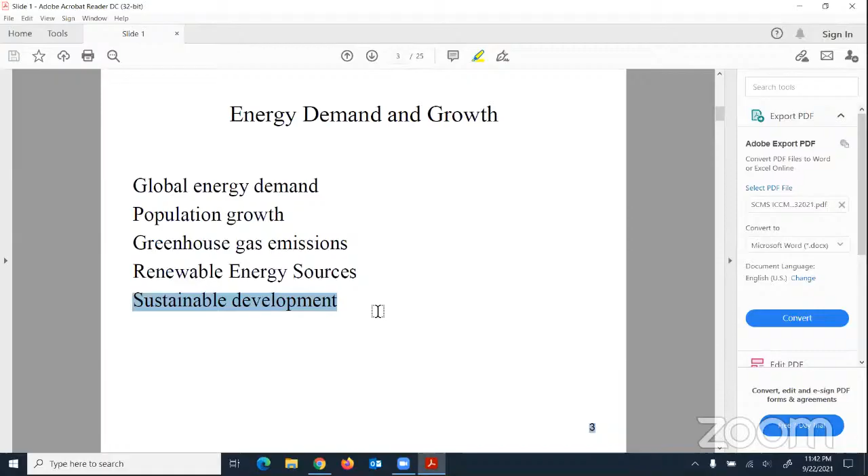So there is a growing interest to utilize more and more renewable energy sources. This way, at least we can bring down the emissions and the related side of global warming. And it will also lead to sustainable development. Okay, as you can see, I'll just give a little brief by taking this particular data, as you can see here.

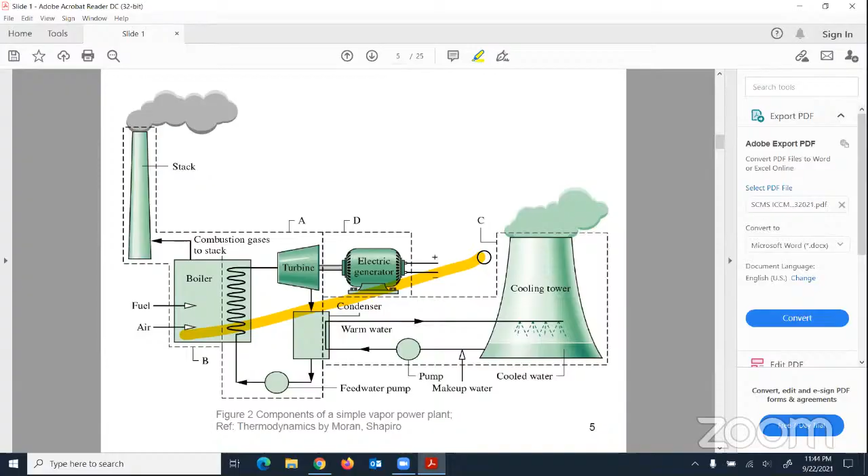So if we look into the research investigations that have been and are still being conducted, these are all aimed to improve steam power plant performance: cycle operating conditions optimization or modification, advances in blade materials and their role in work output and efficiency improvement. So research is still conducted in this area, particularly using thermodynamic knowledge to further advance them. And we can look at how, with time, the different energy systems are being developed or advanced.

So if I go to the next one, you see there's a combined cycle power generation. So maybe before I highlight the details, probably I should put what it is. So if you see here, in case of a combined cycle power generation, this is what a gas turbine cycle is. So here we have compressor systems.

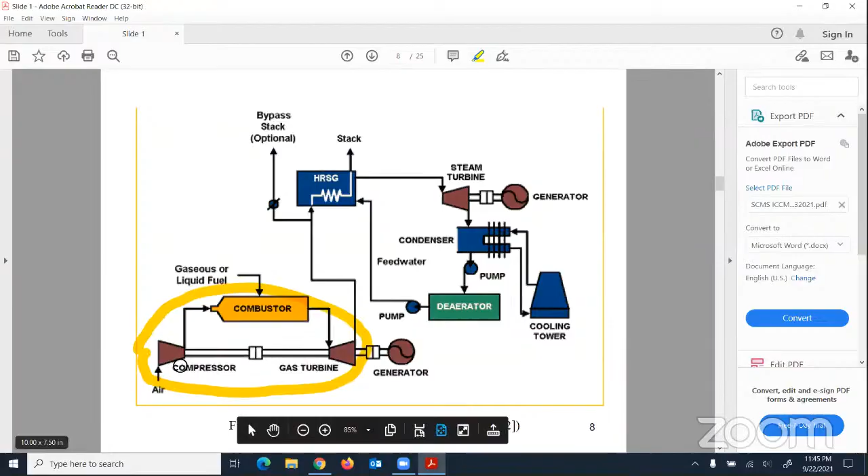So the compressed air goes to a combustion chamber. So it is represented here. Typically, it's a natural gas or gaseous fuel fed. So we burn the fuel. Depending on the gas turbine type, the air fuel ratio is controlled to meet the gas turbine temperature and operating conditions requirement. So this is coupled to a generator.

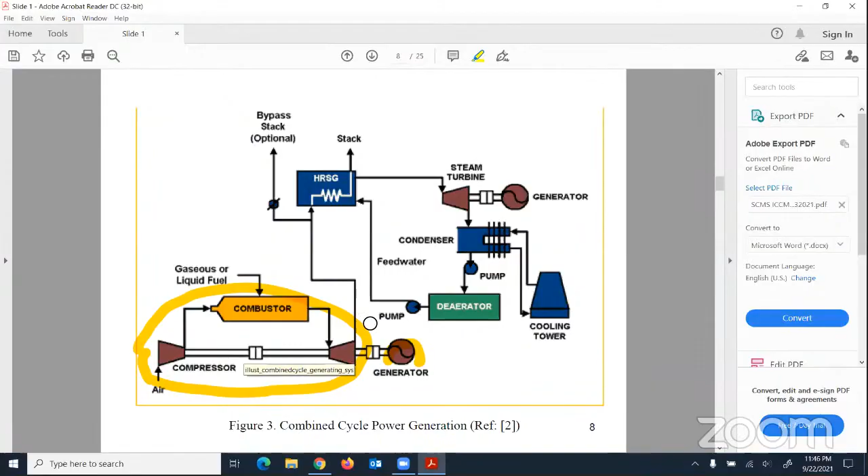So when fuel is burned, the gases go into the gas turbine system where mechanical energy is produced that drives the generator where power is produced. Now with time, with gas turbines becoming so much advanced, the exhaust gases coming out of this system are at quite high temperature. So there is a way to recover waste heat from those gases to generate steam.

So this HRSG stands for heat recovery steam generator, where part of the waste heat from these gases is utilized to produce steam, and that steam will go to a steam turbine system to which a generator is coupled, and that will produce power, and it will have all the steam cycle systems one has an idea of from thermodynamic knowledge.

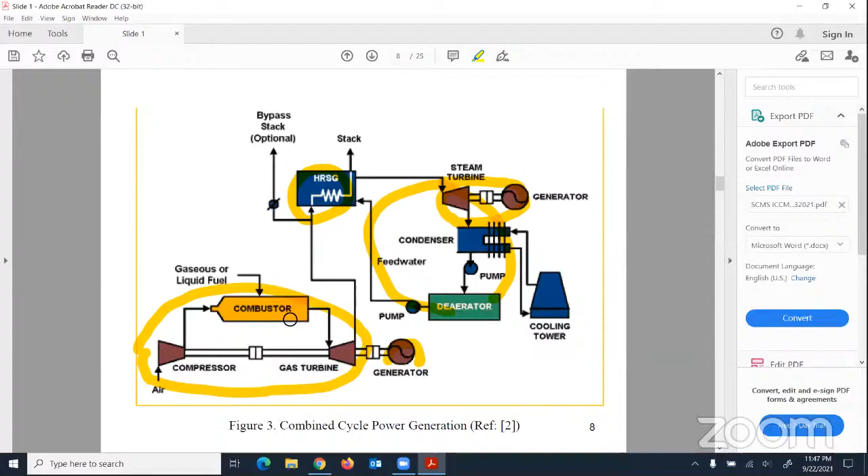So if we observe, here the fuel is fed. This is where the energy input is. So power is generated using the gas cycle system. Then the waste heat from the exhaust gases is utilized. Part of it is recovered to produce steam, and it is used as a working fluid to drive a steam cycle system. So together, this is what a combined cycle is.

These are the ones which are growing a lot in popularity because their efficiencies are very high. It is a combined heat engine system. Now, why they are becoming popular: because of higher overall plant efficiency, and if it is a natural gas fed system, then the emissions will go down. And in many cases, the economy side is also good. So combined cycle power plants are gaining popularity because their higher efficiency helps not only to produce more power, but with reduced emissions.

Now the question is still here: if it is natural gas fed, though we say it is a high efficiency system, there are still emissions associated with the gas. How can we reduce further, or how can these systems be modified, maybe utilizing renewable sources or biomass? That's what are typically called hybrid systems. So if we look into the developments taking place, this is a combined cycle system, as I showed in the previous slide.

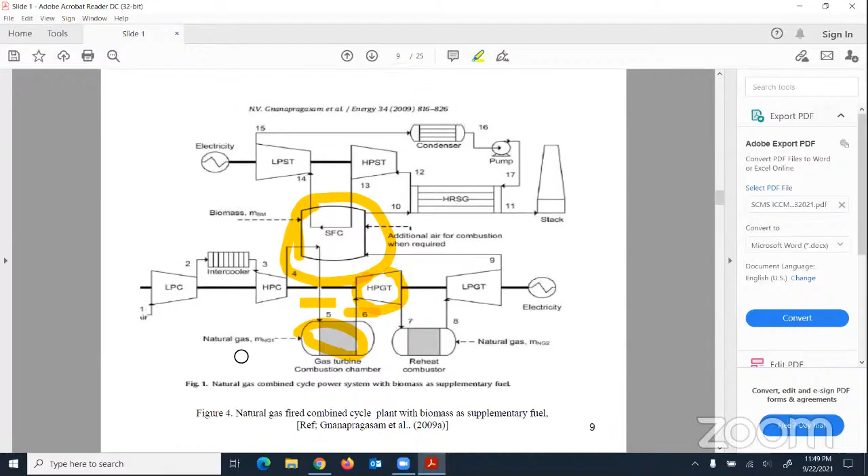Now, for a selected gas turbine configuration, for the set conditions, since we are increasing the temperature of the compressed air with this operation, it needs less natural gas. And the gas turbine system will generate power where the generator is coupled. Now this will go to the HRSG, and it is utilized to produce steam, and the steam cycle will run.

So if you notice, compared with the previous combined cycle configuration I showed, this is modified to incorporate an SFC where biomass is burned. Depending on how much energy is fed and how much heat is recovered and utilized with the compressed air, the amount of natural gas needed is going to decrease. So that way, CO2 emissions can be reduced further.

So for these types of systems, there is a growing interest now. There's a lot of research being conducted, and in literature you do find a lot of details because of their interest, or the way natural gas is now clubbed with biomass, so as to reduce CO2 emissions.

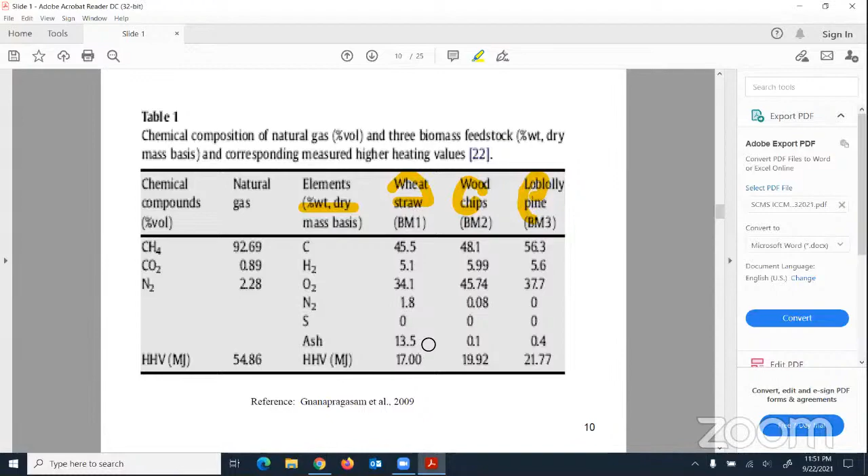There are studies, as I said, considering different biomasses. So the investigations from the literature show that there is a good scope to reduce CO2 emissions. So the research that is growing now with combined cycles is not only to improve their performance, but to utilize renewables like biomass or solar energy in hybrid mode to further bring down the carbon dioxide emissions. Okay, so that is one area.

So if we look, the current research focus in these combined cycles is a lot on how to utilize renewable biomass or solar with them, and that's where research areas are focused now. And not only that, in many cases, how to utilize even biomass in co-firing with coal to reduce emissions.

So let me show you a typical power plant configuration that could go with co-firing mode. So this is a typical boiler in a steam power plant. Imagine it was operating 100% with coal. Now we are trying to have it in a co-firing mode by having biomass. So depending on the ratio of the coal and biomass, whether based on the same flow rate or for a fixed heat release rate, the biomass and coal flow rate is adjusted such that the conditions are met.

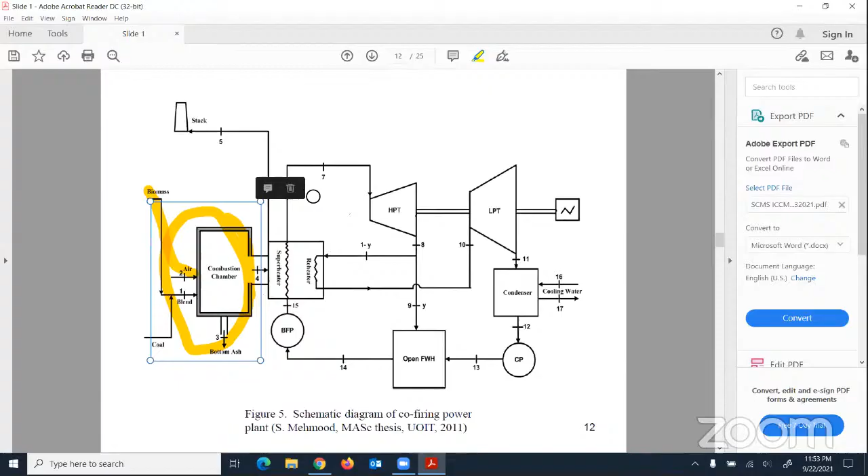So in whichever way it is, the thing here is by having biomass in co-firing mode in a typical boiler system of a power plant, we can analyze and do all the calculations related to this side. So whether we consider a particular flow rate of biomass into the boiler system, or for a fixed heat release rate, the coal and biomass flow is adjusted such that the conditions are met. So this combination helps not only to utilize biomass, but to reduce CO2 emissions.

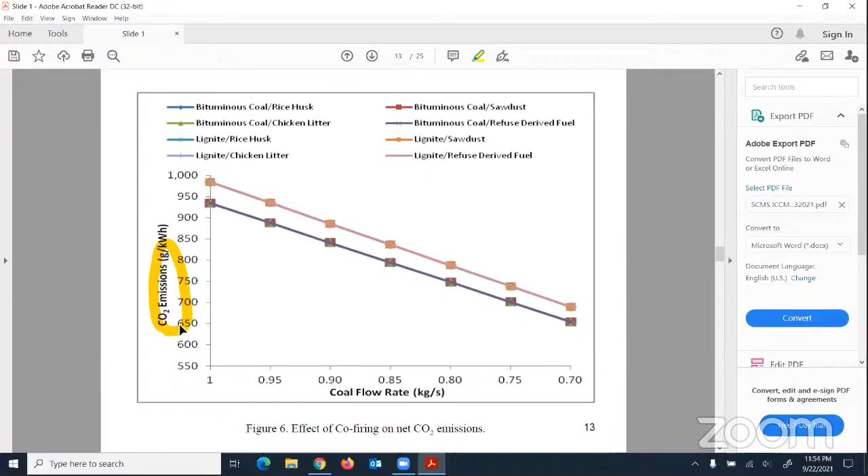So again, as I said, this co-firing approach is attracting more and more interest given its ability to reduce emissions and to utilize biomass. There's a good amount of literature and research details available. So if we see here, this gives an idea about the emissions depending on how the biomass and coal flow rate is adjusted. So as you can see, there is a tremendous amount of scope to utilize biomass in co-firing mode with coal-fired boilers in power plant systems. Thereby, we can reduce CO2 emissions.

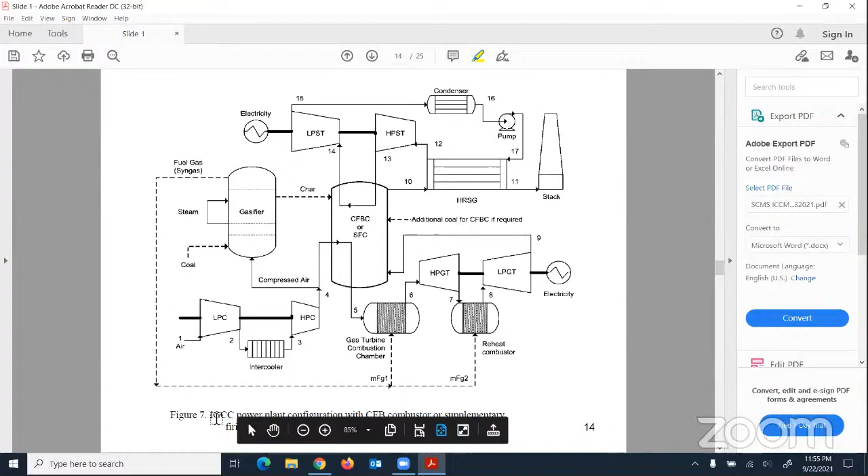The next area in continuation, from a basic steam power plant to combined cycle power plants, is how combined cycle power generation systems can be modified to make them in hybrid form using biomass or coal. Now, what you are seeing here is a typical IGCC. A lot of research is going on in these systems. What does IGCC stand for? Integrated Gasification Combined Cycle. So please let us observe.

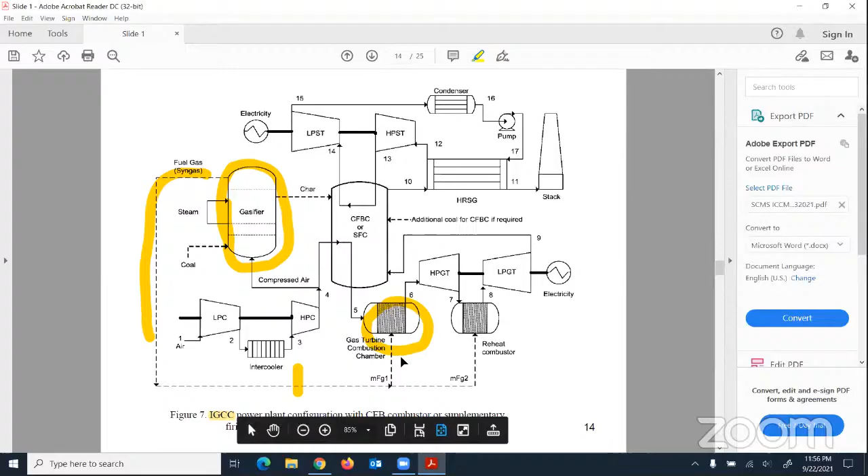So typically, this is a gasifier. Depending on the type of gasifier, let's say coal is fed, and steam or air is supplied. So we are converting the coal into a gaseous form and it is cleaned. Now this gaseous fuel is taken to the gas turbine combustion chambers. So one can estimate the composition of the gaseous fuel, its calorific value, all these details. Once we have the gaseous fuel, this is the gas turbine combustion chamber where it is burned. Now this goes to a high pressure gas turbine system. Then it has a low pressure gas turbine system with a reheat combustion system. This is where the generator is coupled.

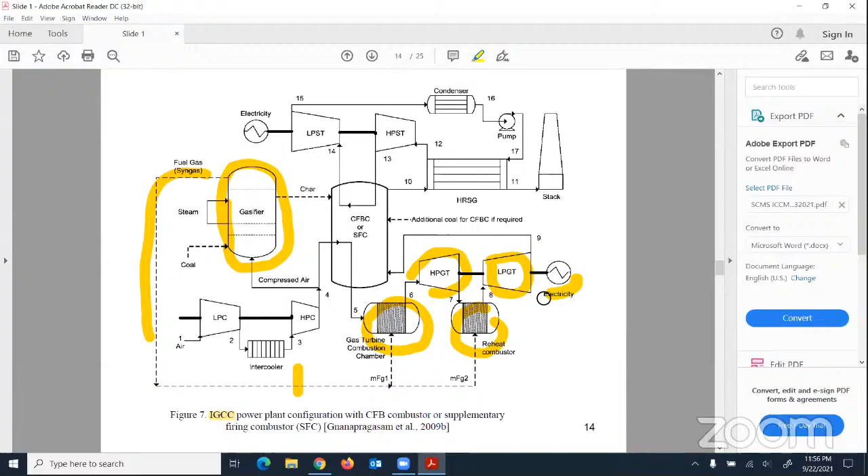So basically, we are utilizing solid fuel, which is coal. It is converted into gaseous form. The gas is cleaned and it's burnt in the gas turbine combustion chambers. And through the turbine system, power is generated with the help of the generator. Now, the exhaust gases are still hot, at high temperature. So they could go to a heat recovery steam generator and generate steam that will drive a steam cycle. Or it can still have one more combustor system in between to feed heat to compressed air.

So depending on what sort of configuration we are going to utilize, the idea here is, if it is coal, the coal is not utilized as in the steam power plant case, that is with a modified Rankine cycle system. The coal is gasified in a gasifier, the gas is cleaned, it goes to a gas turbine combustion system, and it drives the gas turbine cycle where power is produced first. The waste heat from the gases can be utilized in an HRSG to produce steam. That will drive a steam cycle. So basically, this is operated in a combined cycle mode.

Since it is integrated, that's how the name comes: integrated gasification combined cycles. So I think now, with reference to coal, the future direction is going to be, if we want to reduce emissions, we want to produce power with higher efficiencies, because combined cycles are very efficient. This is where the direction is going to be headed. This is where there's a lot of scope to do research.

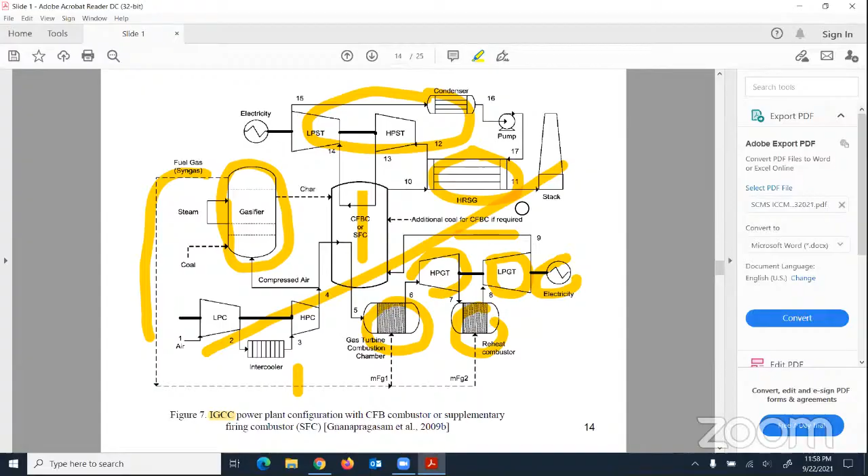And there's a growing attention. Many research investigations are conducted. So this offers a great future scope, particularly to utilize coal with combined cycle power plant configuration systems. These are highlighted. There are many areas to do research, from gasification details, analysis, modeling, to considering the type of systems, not only to produce power, but even to produce hydrogen, how biomass can be utilized as a supplementary fuel. The exergy analysis, which I will be speaking about with the second law a little later, many things can be done.

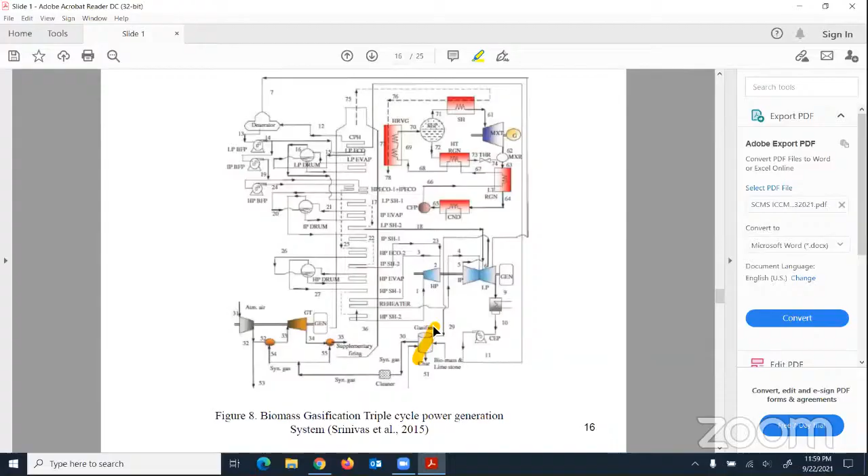So basically the idea is, the one that is shown here from a research paper is based on biomass as a fuel. So this is a biomass gasifier; it is gasified, it is clean, and that is going to be utilized to burn in a gas turbine combustion chamber and drive a gas turbine power plant system. The waste heat will be utilized to produce steam and to drive a steam cycle system.

What comes here extra is, further down, it is utilized with what you call a vapor cycle. This is not steam, please. A low boiling working fluid. So to produce power, basically using a Kalina cycle. So we have a gas cycle, a steam cycle, and a low vapor operating cycle. So this is a triple cycle from the same fuel source. This is where now you see a lot of research is again conducted in the literature.

So from a Rankine cycle to combined cycle systems, now research is being conducted and headed into triple cycle power generation systems. Thermodynamically speaking, the efficiency is getting improved a lot. For a system like this, not only thermodynamic investigations, we also need to look into economic details and many more. But as more details are understood, when economically they make meaning, they are going to come into picture. I think that is typically the developments on the power plant systems that I wanted to discuss.

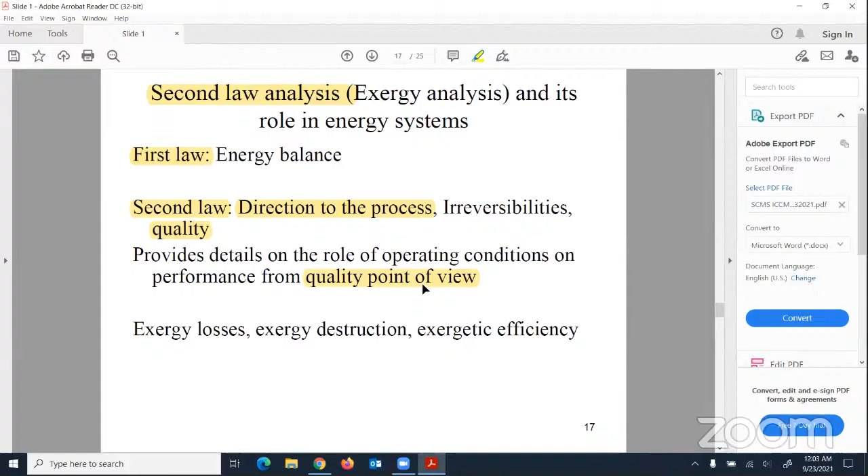And it will provide the role of different operating conditions on the system performance from a quality point of view, which I will be sharing some details on as I go through the next couple of slides. Okay, so there is a way to conduct this analysis. Typically these days, a typical thermodynamics book will provide details on how to conduct exergy analysis or second law analysis. And in the literature, we come across a lot of research that is being done.

Typically the procedure is, once any system is considered, let us say a thermal system or a power plant system, we go around at different states, try to calculate the availabilities and the role of the physical exergy and chemical exergy. Typically, we neglect the role of kinetic and potential effects or those exergies.

So in exergy analysis, the procedure is, once we know at state points the values of enthalpies, entropies, those things, we calculate the availability. So the availability could be estimated. Now we estimate what is called the physical exergy.

The physical exergy is, if you take a compressor, when atmospheric air enters through it and gets compressed, at the exit of the compressor its conditions are different. The composition is the same, but conditions are different at high pressure, high temperature. So with reference to the atmosphere, or the dead state, it has the ability to do something. That's the physical exergy, and the exergy associated could be calculated in this way.

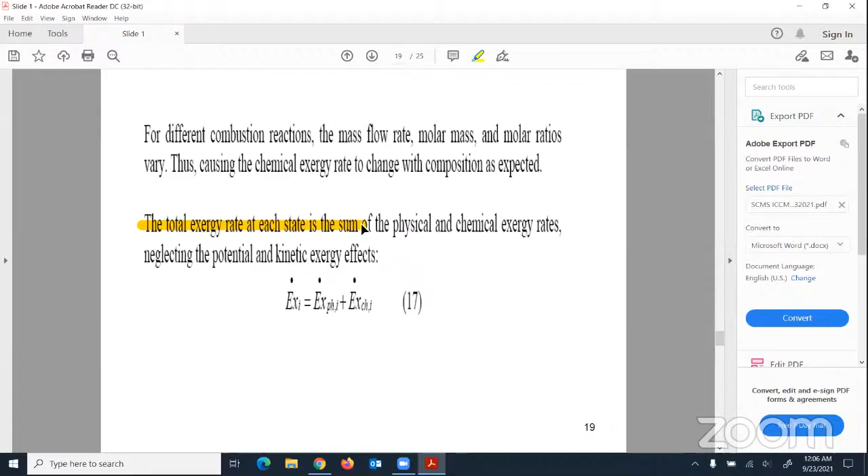So for a considered system, depending on the state, we calculate physical exergy, we calculate chemical exergy. As I already said, the exergy terms associated with kinetic energy and potential effects are usually small and people neglect them. So once the physical and chemical exergy terms are calculated, the total exergy rate at each state, which is the sum of the physical and chemical, could be calculated. So the idea is to calculate the exergy values at different states, calculate the total exergy, then we define the performance.

When we define the performance, what is it going to provide? Why should we do the exergy analysis? What additional details will exergy analysis provide compared with energy analysis? Energy analysis, typically the first law of thermodynamics, involves making energy balances, but we are not getting into the quality side of the discussion. It is the second law of thermodynamics, or the exergy analysis, that provides the quality side of the analysis and details.

Let us say there are a set of operating conditions that were taken. If we analyze a heat recovery steam generator, we are interested to see what happens to the exergy losses and exergy destructions put together. That is through analysis, and if it is represented, we see the results.

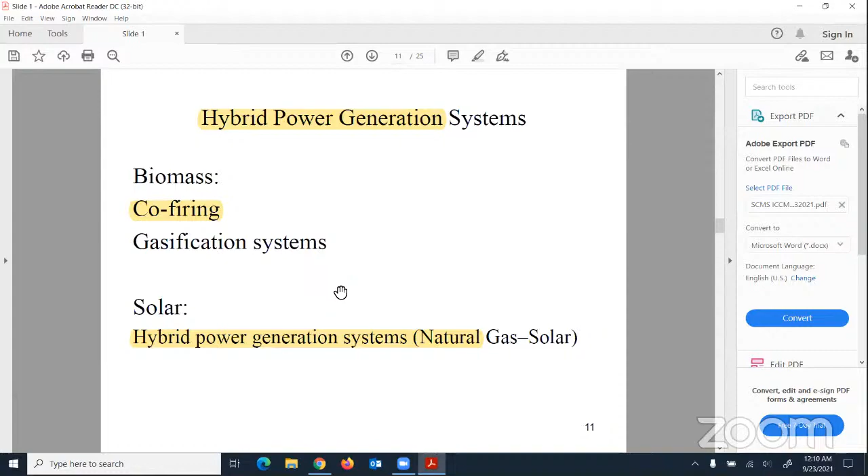So now, when we burn the natural gas with the correct air fuel ratio, the temperature associated with the products will be very high. Meaning the air fuel ratio will be adjusted to meet the gas turbine requirements. When we supply more air to bring down the temperature, that is dilution, which is an irreversibility that contributes to entropy generation. That destroys quality. So from a first law point of view, this doesn't bring out anything. It simply makes energy balances.

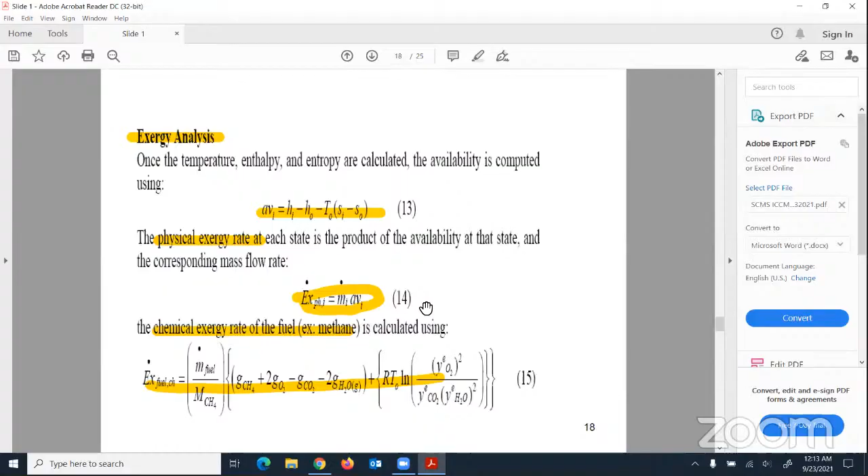So on this count, second law analysis for engineering systems is gaining a lot of importance, because exergy analysis, if we go by the procedure well laid out in the literature, if it's conducted, the results will provide a significant amount of information and details on where we can focus, on certain components or processes to improve them further, leading to further improvement in performance.

And if these are systems utilizing, let's say, natural gas or coal, there is room where emissions can be brought down. Or, from a second law point of view, those systems' performance can be increased or improved further. So that is probably good reasoning for why the second law is receiving a lot of attention.

So let me bring out one more thing. We see process heat, that is steam, is utilized in many applications because it is an effective medium for supplying heat. In earlier days, they used to use steam boilers to produce saturated steam, and that saturated steam used to be supplied for process heating applications. If we consider a boiler used to produce this process steam for applications, just only steam, typically saturated steam at around 150 degrees or 200 degrees centigrade.

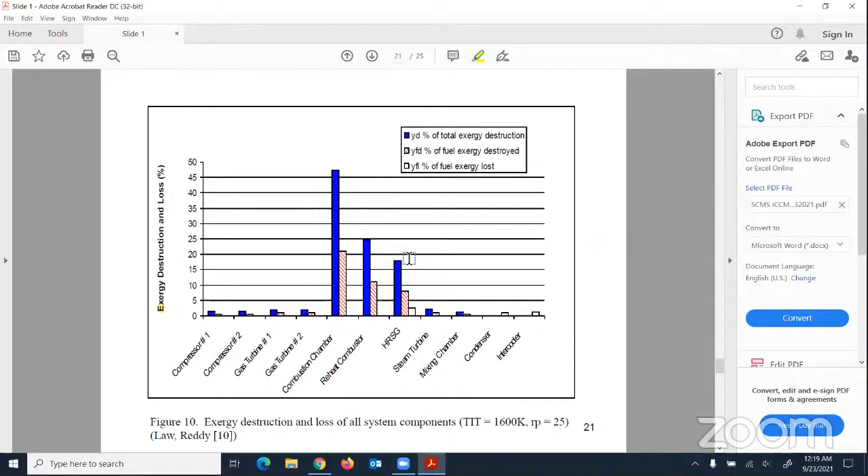So with the help of the second law, as more and more we understand and more research is done, if those are natural gas or coal-fed systems, this exergy analysis approach will ultimately lead to making them more sustainable. This is where we see in the literature a good amount of research work now focused, whether through power production, power plant systems, or a combination of systems where we generate power as well as hydrogen production. There are many approaches or methods that are developed, leading to sustainable indicators.

If it is a complete renewable system, let us say solar or wind, accounting for the materials or other things related with those systems, generally they don't contribute to any emissions. So if we give an indicator for them, then we can compare this with coal or natural gas systems, or a hybrid version of them—like if I have a combined cycle power plant where instead of natural gas only, biomass or solar is fed. So we convert that into a hybrid mode. How do we compare this as if it were a completely renewable type of system?

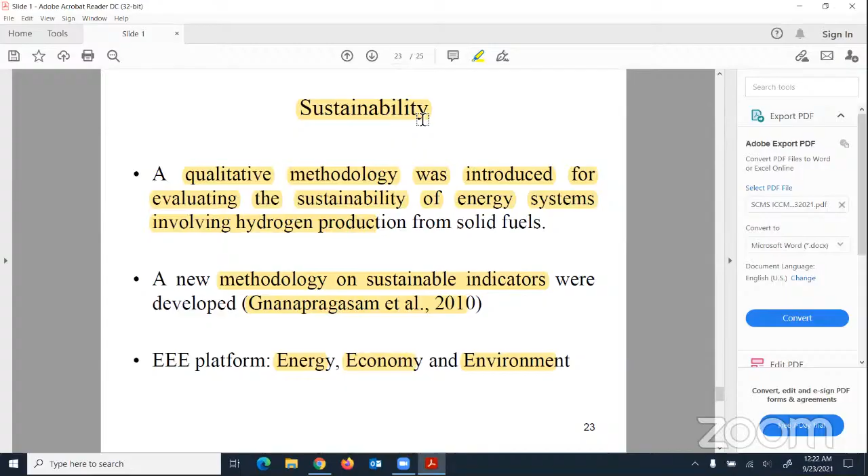So that is how the further contribution of this second law of thermodynamics is leading towards the sustainability side of the discussion or development. Okay, so I think I'm getting close to the conclusion side of the discussion now.

So as I said, the advances, the research investigations on power generation systems, they are happening. A lot of research is conducted on combined cycles, combination, hybrid, IGCCs, and how to advance them. It is not just based on first law, based on the second law of thermodynamics. So still there is a lot of room. We need to do further research not only in power generation mode, in multi-energy systems.

Let us see. There could be a power plant system that is generating power using combined cycle. Still, there could be room to generate hydrogen, or multi-output systems. So that will further lead to improved efficiency. And this is the big area now in terms of the energy side, particularly how to have solar or biomass combined with natural gas or coal in hybrid energy systems.

In power generation systems, the biggest advantage that comes is if we can utilize solar, if we can utilize biomass, let us say with a natural gas system or a coal-based power plant system, because these are large scale systems. So depending on how much solar is utilized, how much biomass is utilized, there is a room to reduce emissions. And that on one side is going to be a more sustainable way of doing power generation. And by utilizing the knowledge of second law, their performance can be further improved, which will make them even more sustainable.

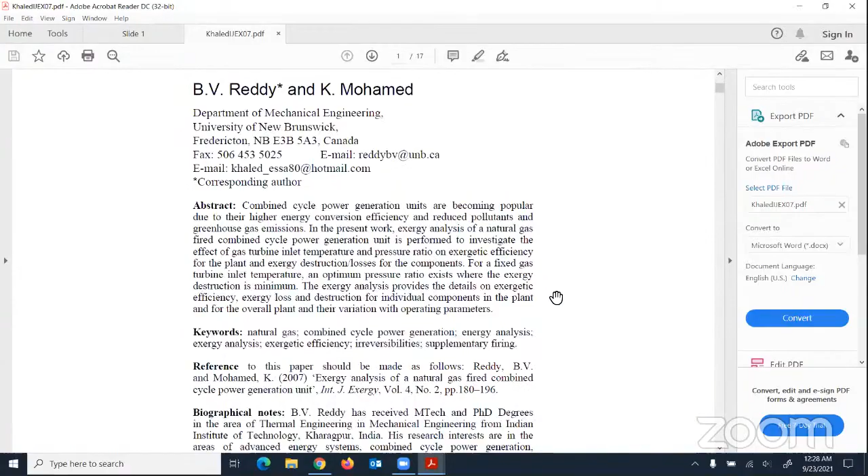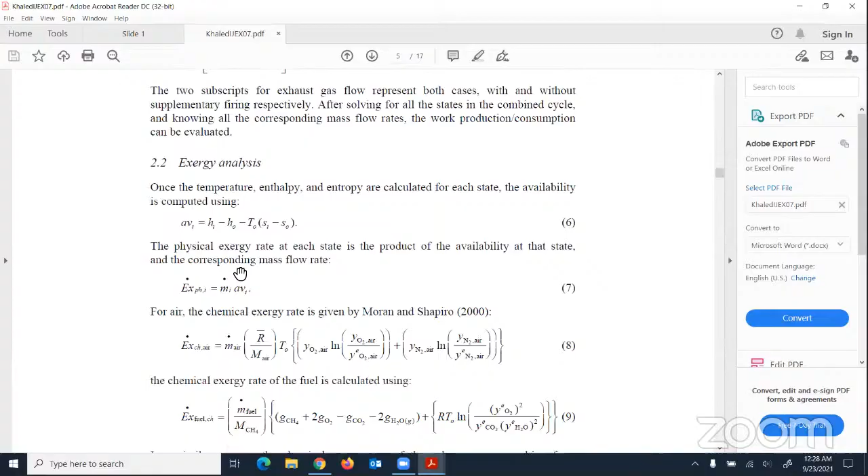There are not only many research publications available. Suppose this is the system, let us say this is the combined cycle system that we are interested in. In this paper, the whole procedure is given. Start with energy analysis, make combustion calculations, state point calculations, then go to exergy analysis, define the physical exergy, the chemical exergy, get all those values, and define for the components all the efficiency terms based on exergy. Then a simulation program was developed based on MATLAB to run those details and see how all the parameters affect or influence the performance.

So this particular article, if any one of you are interested, is available, so it could be obtained, or you can see there are many such publications like that. The last thing before I stop for the discussion is, this exergy analysis, as I pointed out, is gaining more and more popularity. As I say, it brings more details from a quality point of view.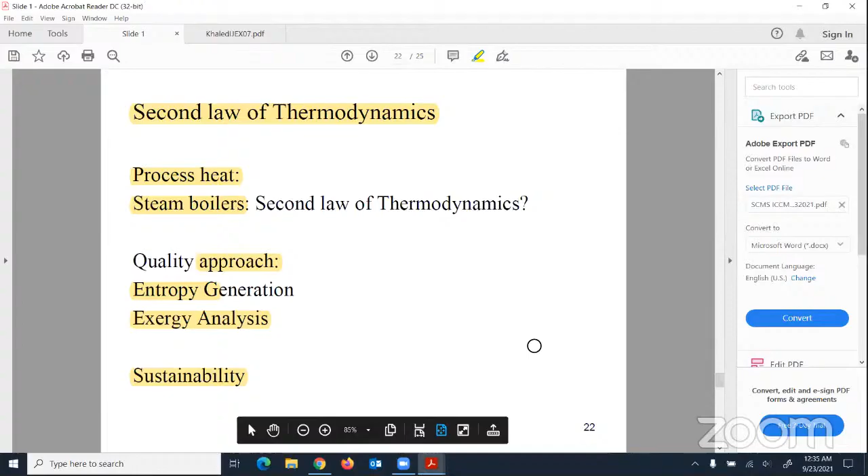Just give me a second.

And if you go by the thermodynamic second law, we supply more air, we dilute more to bring down the products to 800 degrees centigrade. So irreversibility is high, entropy generation is high. If you take the latest gas turbines, which operate around 1350 degrees centigrade, now we are diluting less with time, with advancement of materials. Now the entropy generation is less, or the quality destruction is less.

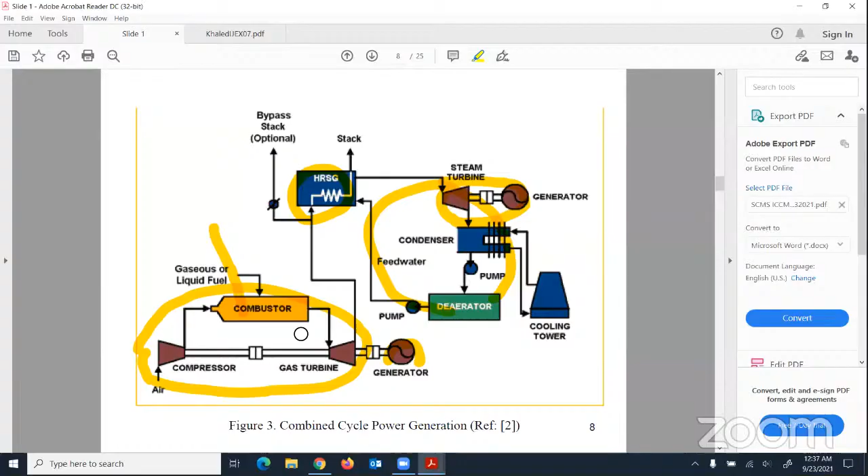So that is one way the thermodynamic second law knowledge is helping. If we develop a material that will withstand this, that will improve the performance, or an improved material utilized in a process helps to have higher performance, or the quality destruction is less. So that is where the irreversibility or entropy generation term comes, and how it is being reduced. I think you probably got the meaning.

Yes, sir. This subject, till the first law, is purely mathematical, easy to comprehend. But when we start the second law, it becomes more philosophical. That is what I always felt. So I have so many doubts from that point of view. That is what I asked.

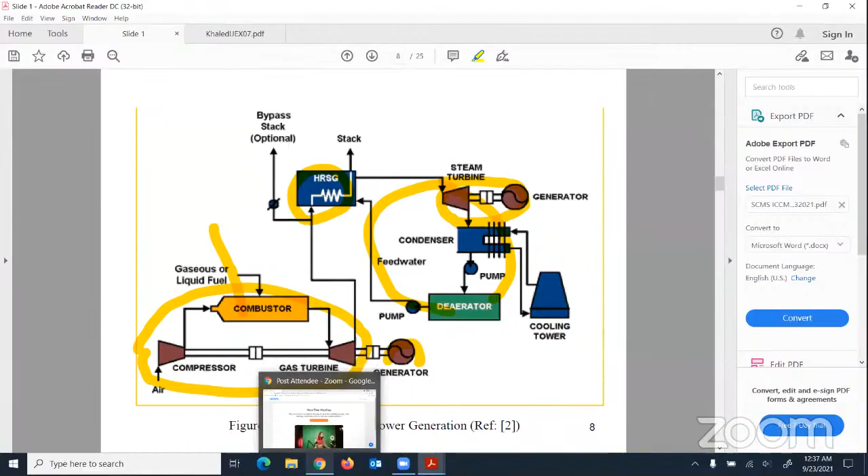It's very good. You know what the second law tries to tell you: how the direction will happen, what the limitation will be. Let me take another example, because you brought a little bit of a philosophical word into the discussion. I will take it a little to that side of discussion. So let us take a water heater.

If we take a water heater, we bring water in a small container, you have a water heater, you are supplying electric power to the water. What happens? The water gets heated. You agree with me? Yeah. Okay. Now, you utilize the same electric power and feed it to a laptop. The laptop works, maybe you are able to present your PowerPoint to your students and discuss.

Now, the first law will tell you, you are giving electric power to water, water was getting heated, so you make an energy balance, take into account the losses. If it is satisfied, the energy balance is done. That is what the first law is. So now let us bring the second law. The second law asks, what were you doing? We were feeding electric power to heat water.

If we were giving that electric power to the laptop, it will work and show the PowerPoint. Now, if we used that 1 hour of power to heat water, and I take the hot water next to the laptop and ask the laptop, please run. For the first law, it doesn't make any difference. You made an energy balance, that is okay. Now, the second law will tell you the hot water is not going to run the laptop. So the second law clearly tells which direction things will happen.

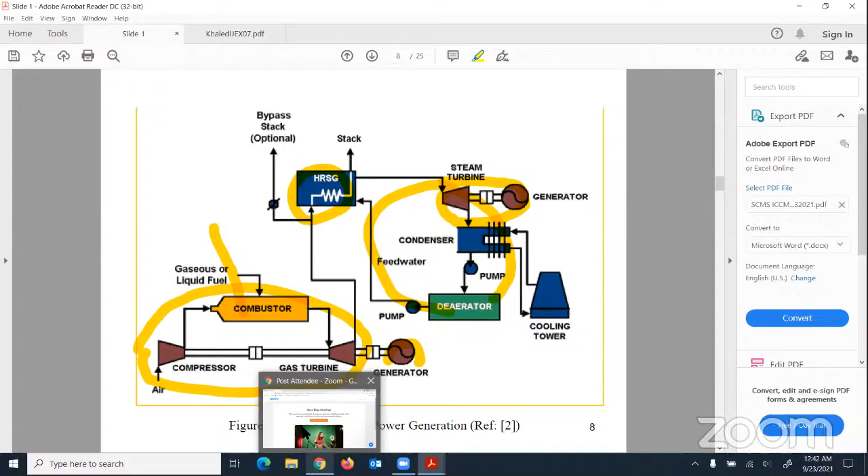Okay. Yes, please. Any other questions? Yes. No, sir. Yes, that's great, sir. Thank you. Thank you, sir. No, it's okay. Are there any other questions, please? No questions. No, there are other participants. Let me see if I can put my video mode back. Are there any other questions, please? Any more questions? Okay. I think you are very clear, sir. If there are no questions, I will take a minute or two, sir, just to share a few more thoughts.

Yes, sir. On the research side of it, there is a lot of room. It doesn't matter whether you are into thermal systems, energy systems, or in general into engineering. Second law knowledge can be utilized to improve many systems further. It doesn't need big equipment. It doesn't need a huge research facility. It needs the knowledge of the thermal side, and when research is done, it is going to bring out a lot of details. A lot of the participants may not be only professors. There could be PhD scholars, masters students, or some could be from colleges. Whether you have facility or not, facility should not restrict you in doing some research.

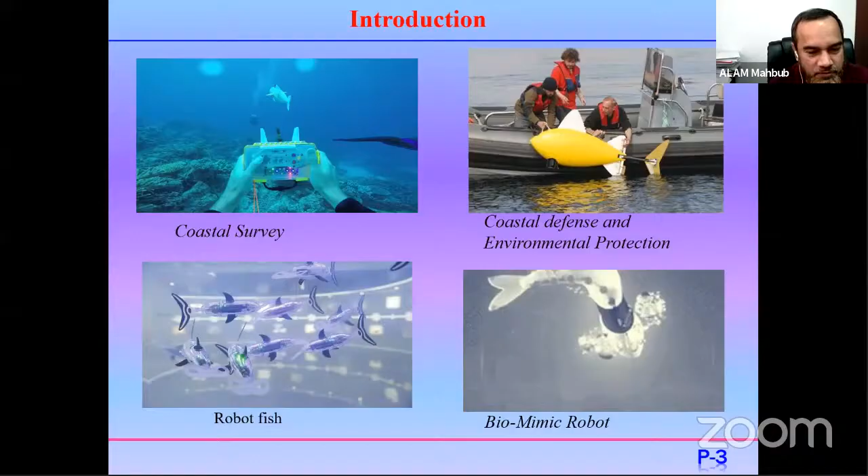Like why birds school, fish school - that's what we need to understand, why they move together. Even land animals like buffalo or deer also live in groups and move together. Definitely there is something - we even find it in human crowds.

Then why do fish or birds school? There are different things we need to understand. They do it for social purposes, for decision making or information sharing. They live together or meet together. For mating and foraging, that is another purpose. And definitely for survival purposes they live together, and also to survive from predators. And when they swim, to save energy, they swim together.

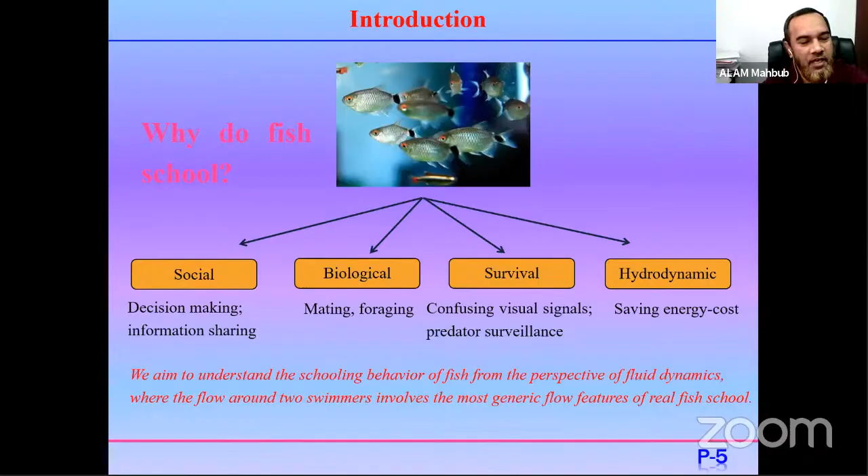So here we try to understand the schooling behavior of fish from the perspective of fluid dynamics, where the flow around two swimmers involves the most generic flow features of real fish school. We cannot use a number of fish, so we use two representative swimmers or two fish, and arrange them in tandem or side by side to see the behavior.

Thrust is the most important factor for prey-predator competition. We know we have small fish and big fish. How does small fish survive from the big fish? It is challenging, right?

If you survey the literature, we can see later that when the big fish approaches the small fish, the thrust for the big fish declines, gets less. On the other hand, when the big fish comes close to the small fish, the small fish's thrust increases - the efficiency of the small fish enhances. So two things: the small fish's thrust enhances and the big fish's thrust decreases. That is why the small fish can swim faster when the big fish comes close to it. That is one fluid dynamic survival technique.

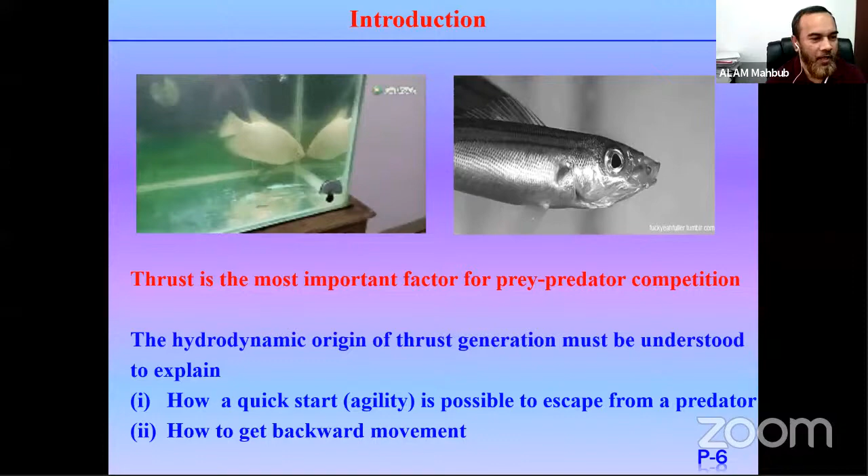And also we'll see here how a quick start, called agility, makes it possible to escape from a predator, and sometimes they need backward movement. How do they do it? Let's see some experiments in the literature. Godoy-Diana et al. did an experiment in a water tunnel, and they made a forced oscillation of a foil. They found different flow patterns depending on the oscillation frequency and the oscillation amplitude.

Beal et al. put a D-shaped cylinder here, and a dead fish, like a robot, was put in the wake. The dead fish is not moving downstream; it appears in the wake, sometimes moving forward then backward, but not moving away from the D-shape. Similarly, a live fish can carry a dead fish in its wake, sometimes pulling it along and carrying it somewhere.

Godoy-Diana et al. changed the STD, the Strouhal number, or simply the frequency. The horizontal axis is the frequency of oscillation, and the vertical axis is the amplitude ratio, A over D, or simply the amplitude. When they increased the STD and amplitude, they found different wake patterns.

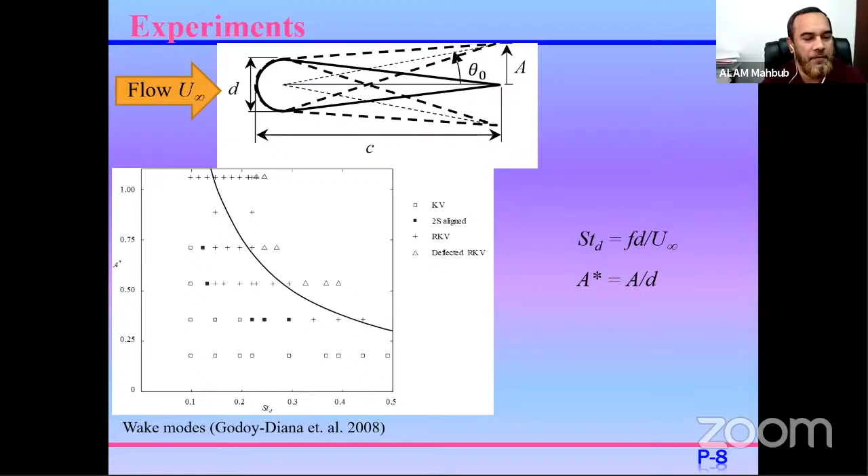Here we did the numerical simulation with changes in STD and A star, the amplitude and oscillation frequency Strouhal number. We found a KV wake, with positive vortices on the lower side and negative vortices on the upper side. This is the general feature of the KV wake.

Then we found, with the solid square symbol, the 2S aligned wake, where the vortices are on the wake centerline.

Reverse Karman vortex forms when the amplitude and STD are increased, at intermediate values of A star and STD. In the video, the positive vortices go on the upper side and negative vortices go on the lower side.

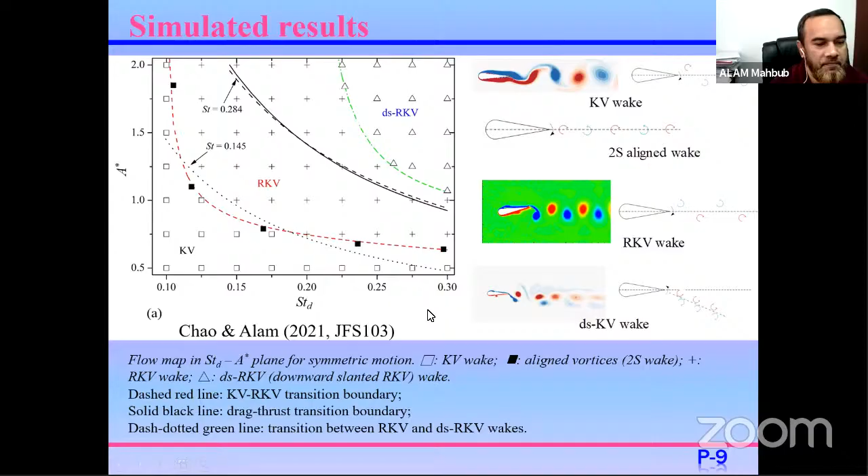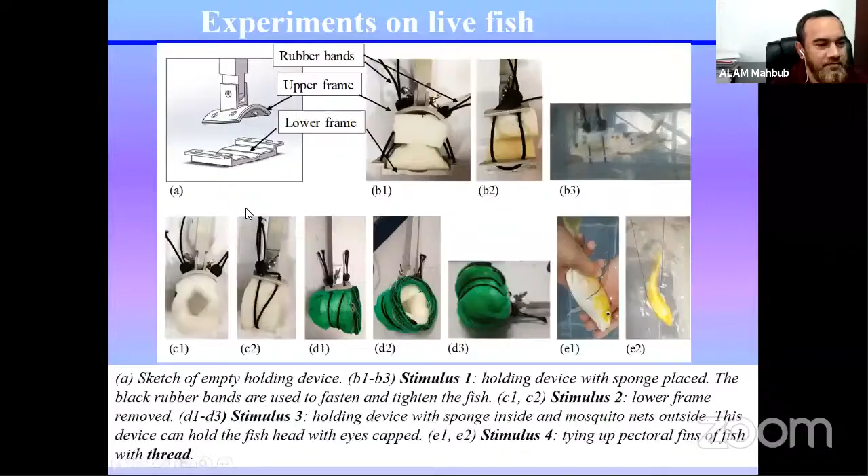You'll see that for the first case, the movement of the fish, it was trying to move forward, but remained.

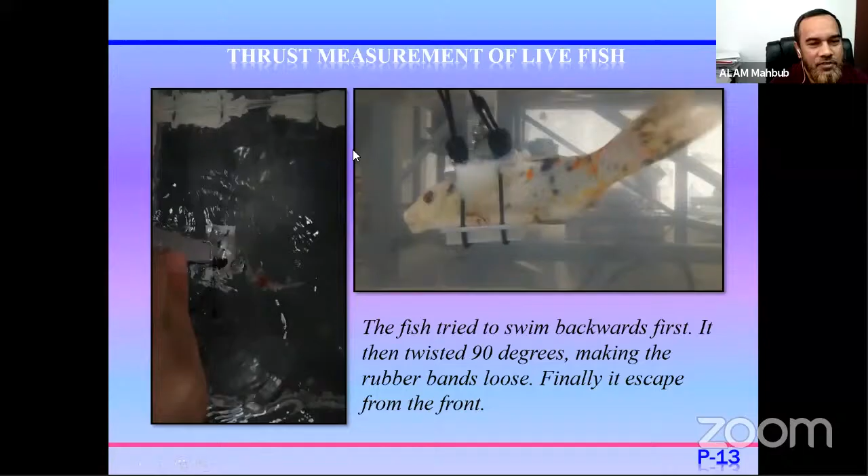We'll see later what the movement of this tail fin is, what they do when they need to move forward. You can see here what they're doing. Do you think the tail movement is sinusoidal, or sometimes is one stroke faster and another stroke slower?

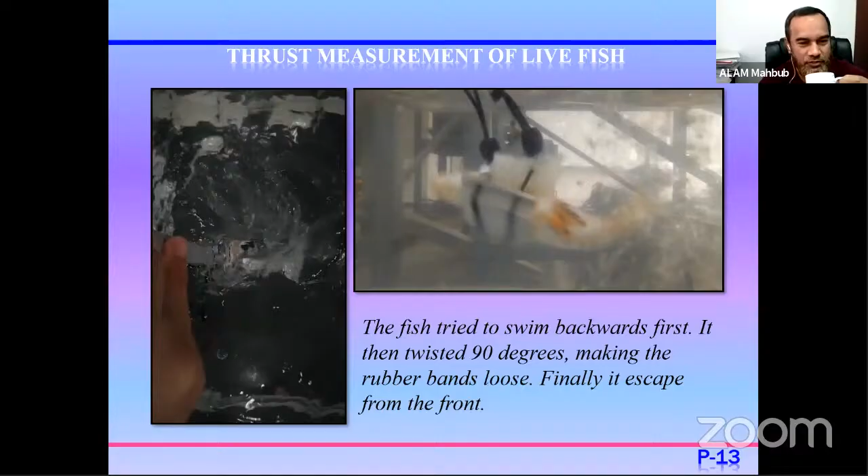Look carefully at the forward stroke and the difference between the forward and return stroke.

In this case, it did not try to escape because it was held tightly, since we tried to measure the forces using the load cell. We wanted to make the fish swim, but it didn't. When they know they can escape from the net or device, they move or swim violently. When they don't know, or feel that they cannot escape, they just keep still like this and take a breath.

And then we used a thread to hold the fish by the pectoral fins. It was swimming like this. Let's see this video here, what happened.

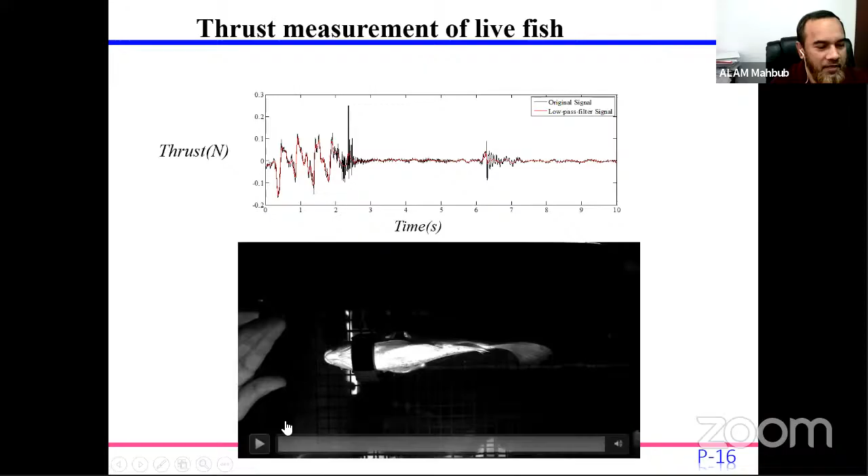When it moves forward, we have a large positive thrust, and when it moves backward, it creates a large negative thrust, particularly for the backward movement.

Then how do they move? You see, in the caption you will see the forward propulsive pattern, it was moving forward. We hold the fish using our hands, and if we just give comfort to the fish, it can move forward. So we wanted to know the tail fin, the caudal fin oscillation, during the forward movement.

What we see here for the forward movement is that the tail moves faster from the large amplitude toward the center. The movement from large amplitude toward the center was faster for the forward movement. We'll make a plot and draw a graph later, you'll see. For the backward movement, the case is opposite.

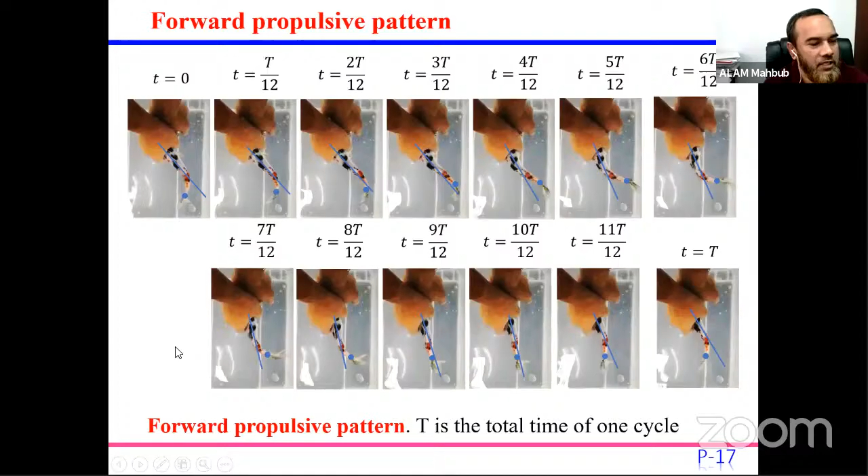For this case, it keeps the tail like this, and we found that the forward stroke is faster. The forward stroke was faster like this, and this one is the forward stroke, and it was faster.

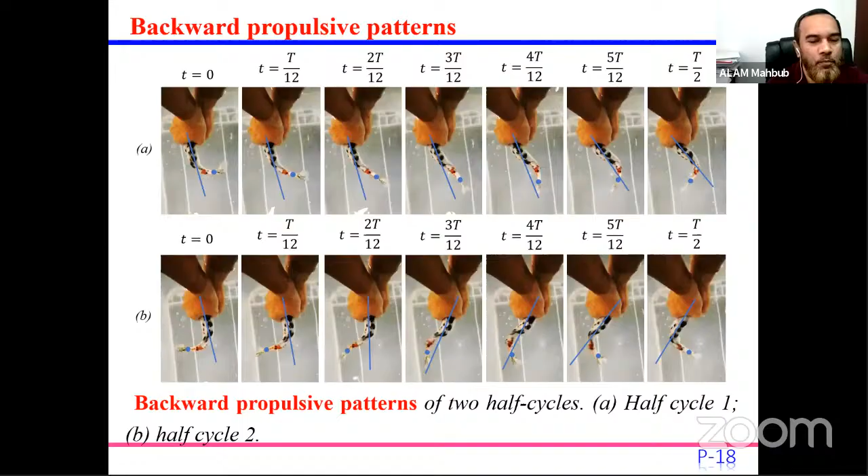That means they try to push the water forward, and the fish itself moves backward. You can see the clear picture here. For forward swimming, the motion from here to the center line is faster, and the motion from the center line to the large amplitude is slower.

We'll call this the return stroke, and we can say this is the forward stroke. So the forward stroke is slower and the return stroke is faster for the forward movement. For the backward movement, the case is opposite: now the return stroke is slower and the forward stroke is faster.

Now first we'll discuss the symmetric oscillation of the airfoil, this foil, something like this. With the Reynolds number up to 200, there's totally laminar flow, so we use 2D simulation.

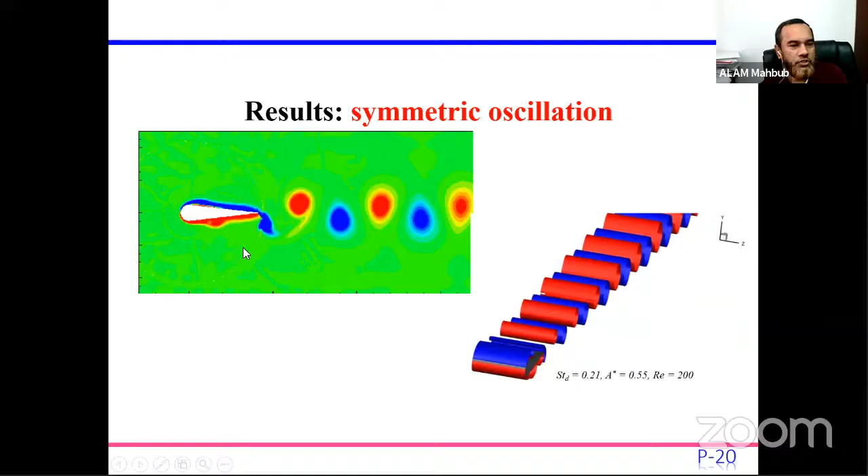Now we define here the symbols, like CT bar means the time-mean thrust. This normalization is as usual; I think it is very common. And the input power coefficient is CP bar. This is the time-mean input power coefficient. And then the efficiency is CT over CP.

Then STD is the Strouhal number based on frequency and D. D is the thickness of the foil, maximum thickness. Here you can see the chord length of the foil; small c is the chord length. So there are three definitions of Strouhal number. STD means thickness-based Strouhal number, STA means the amplitude-based Strouhal number, and STC means the chord-length-based Strouhal number.

A star is the amplitude ratio. And here we put sinusoidal oscillation like theta equals theta m sine omega t, and theta dot and angular acceleration are like this. That's the common things. Now here we'll see the instantaneous CT and instantaneous power coefficient. During the oscillation, how the CT or the CP changes, we can understand from here.

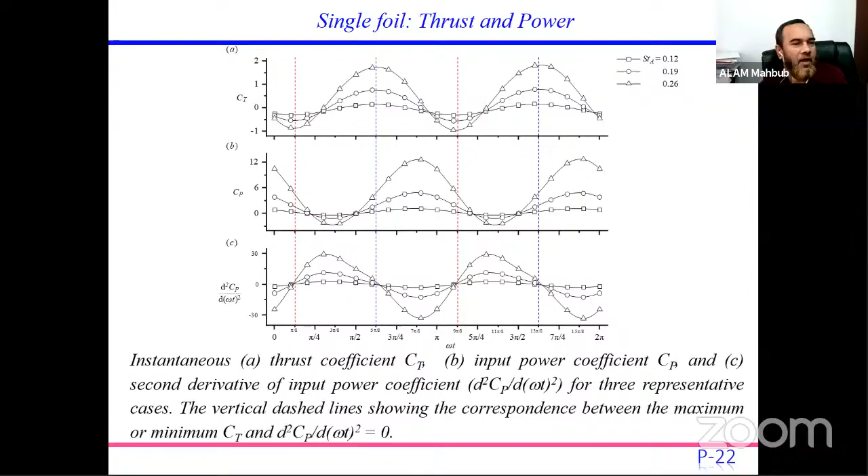So when this second derivative, the gradient of slope, d squared CP over d omega t squared, is changing sign, like from positive to negative, we have the largest CT. We can simply explain it here in the sketch.

When the foil is at the 0 position, zero amplitude, wake center line, just before it we have the maximum CP, slightly before it we have the maximum CT, and slightly after it we have the minimum CT. When the foil is at maximum, before it we have the minimum CP, and when it tends to return, we have the maximum CT. CT is maximum when the foil tends to return from its extreme position.

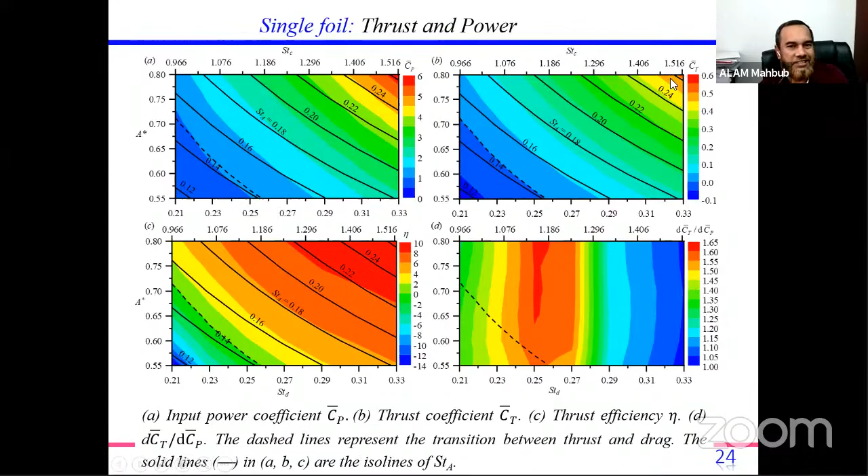Then we did some mathematical analysis of why we need more power input when we increase A star and St, and why we are getting the CT increase with St and A star. We can assume that the hydrofoil, like a flat plate, is oscillating sinusoidally. Since the foil is submerged in the fluid, we can assume some added mass, an element of fluid actively moving with the foil, or the equivalent amount of fluid that plays a role in the foil dynamics.

So we use this fluid. If we assume this fluid is moving with the foil, then it has different kinds of acceleration. Because the foil has Euler acceleration, if the fluid is attached to the foil, then we also have centrifugal acceleration on the fluid. And we have the Coriolis acceleration, because the fluid has lateral movement and also movement along the foil, like streamwise movement. So we have three kinds of acceleration, and these contribute to different parameters.

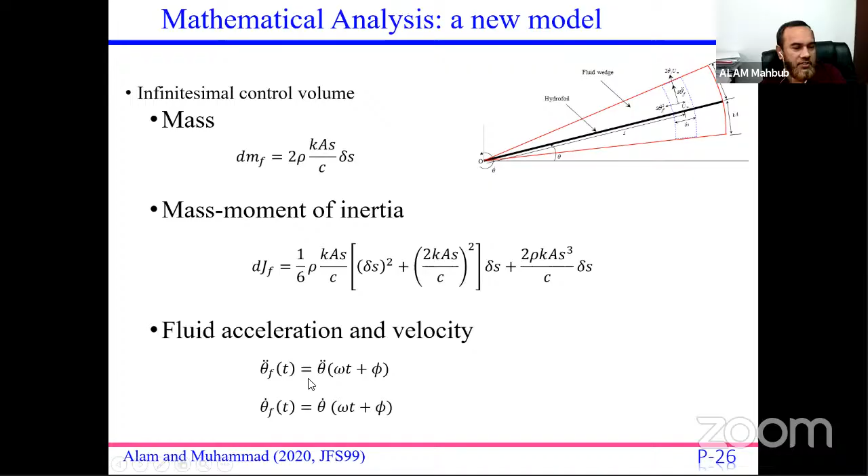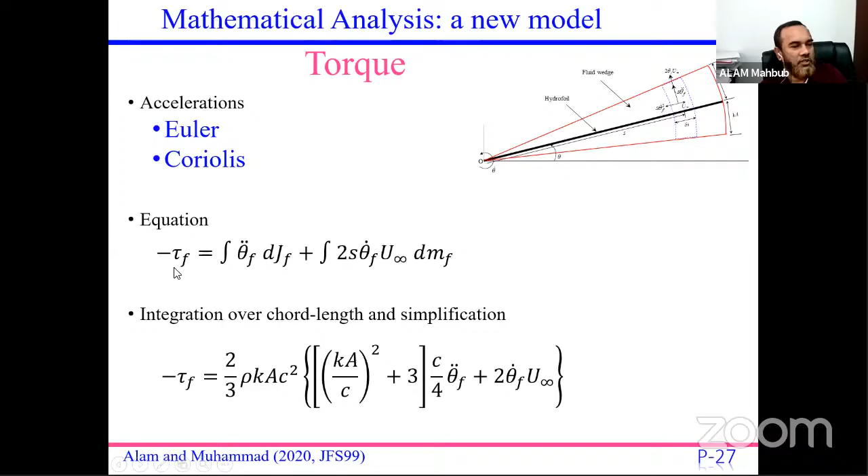So torque is mainly related to power input, and it is connected to the Euler acceleration and Coriolis acceleration. So the Coriolis acceleration and the Euler acceleration times the corresponding fluid mass moment of inertia. Then we found the torque involved.

And for the thrust, when the fluid is moving along the foil, we have the centrifugal force on the fluid, then we have the thrust generation. For this thrust generation, the final form is: CT is a function of St cube over StC. CD0 is the drag on the non-oscillating, fixed foil. So CT must overcome CD0 to get the absolute thrust.

So from this analysis, we found CT varies with the cube of St_A. And from the simplification of the power equation, we found CP is proportional to St_A cube. This is the mathematical analysis result. Again, we see the efficiency is inversely proportional to St_A cube. Now we'll see how the real data behave.

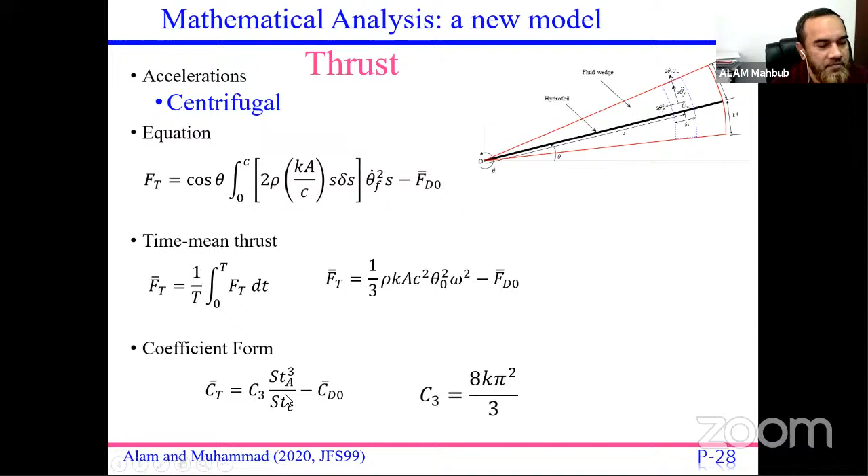So we accumulated all possible data and plotted CT versus St cube over StC, and found a linear function. If we consider this a fixed value, constant, then we can say CT bar is proportional to St_A cube. StC is very small or more or less constant, so CT is proportional to St_A cube.

Here we found CT is proportional to St cube over StC, and we have proved mathematically that CT bar is proportional to St cube. All data converge on this line. That means our mathematical model agrees with the data from the literature. Similarly, efficiency does the same: efficiency is inversely proportional to St cube.

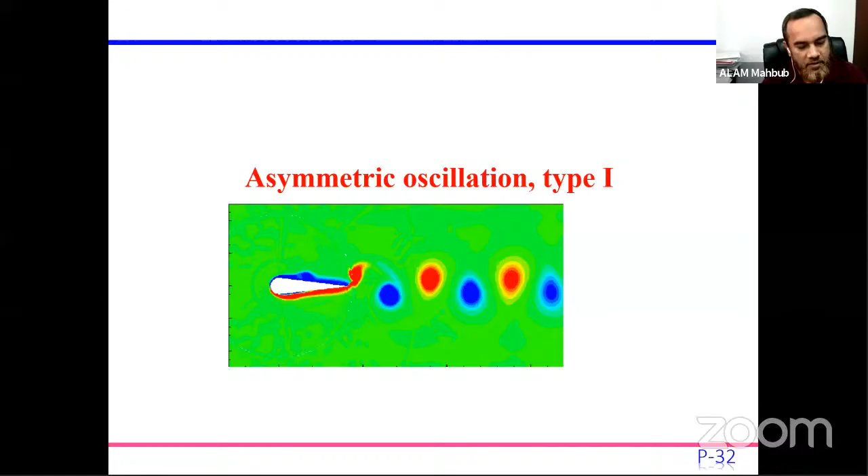So the objective is to investigate the effect of asymmetric oscillation on the drag thrust boundary, providing a scaling law for estimating the drag thrust boundary, classifying the wake patterns, and finding the inherent relationship between hydrodynamic force and flow structure. What we did here is numerical simulation.

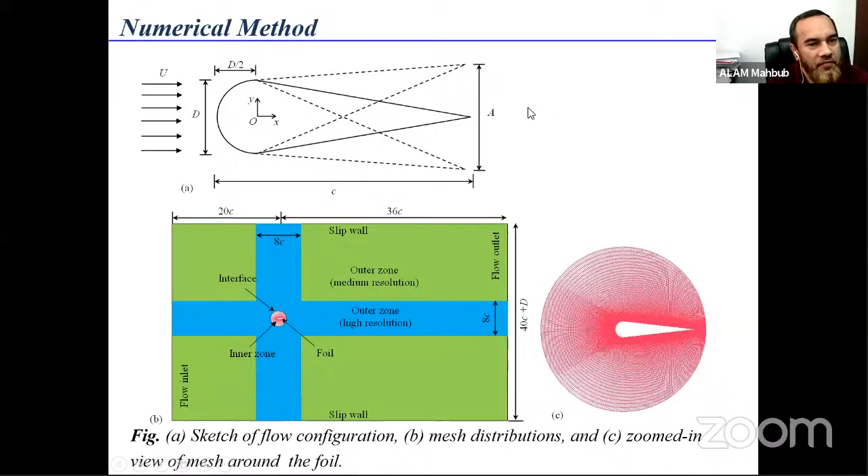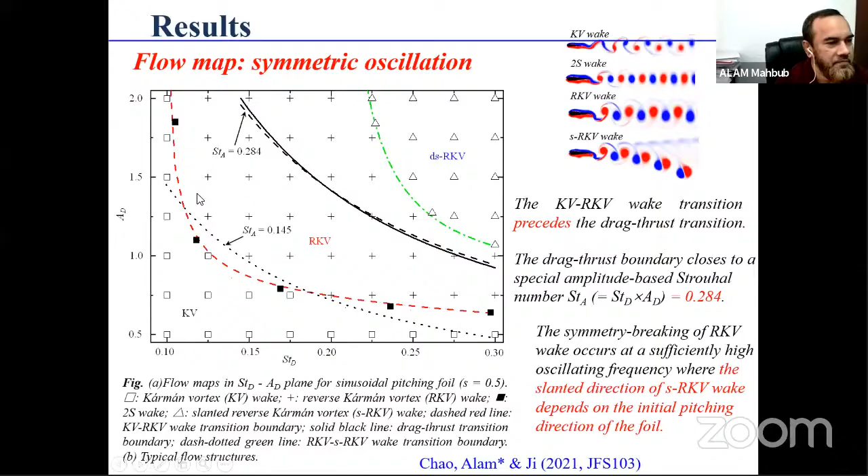DS means downward slanted, and this is upward slanted. Upward or downward slanted depends on the initiation of the foil oscillation. If the foil oscillation initiates upward, then we will have downward slanted wakes, the opposite, and vice versa. So this one and this one are essentially the same.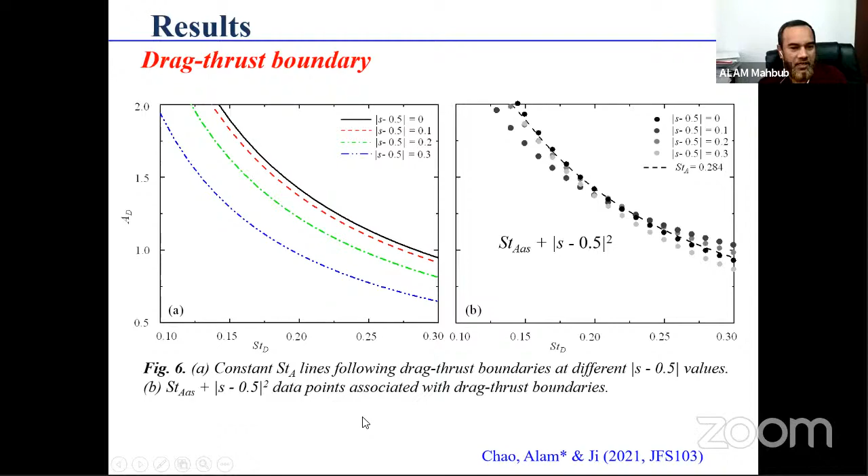If you consider the time mean in the faster stroke and slower stroke, the time mean thrust in the faster stroke, if you see, is bigger than the slower stroke. The slower stroke looks negative. Okay, so mainly the faster stroke is causing the thrust to be positive or increasing. The same phenomenon was observed for different asymmetry parameters. When the asymmetry parameter is 0, definitely it is sinusoidal. The faster and slower strokes are the same.

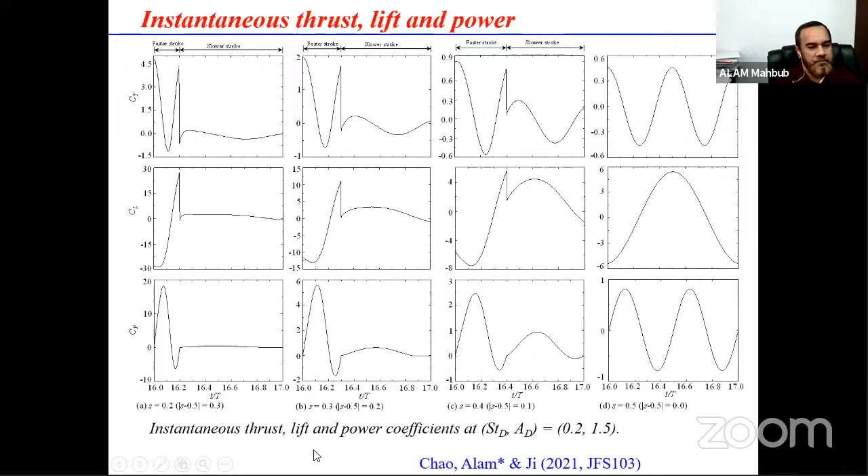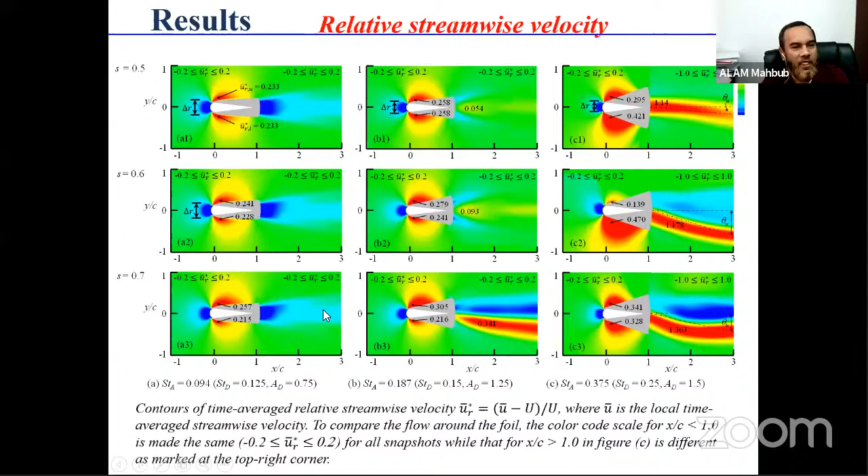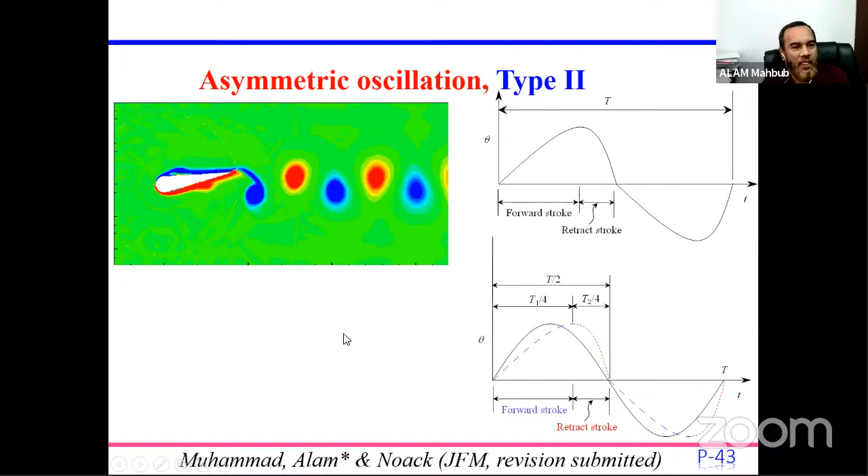Again, we define tau as the ratio; we can say this is the asymmetric parameter. Tau equals T1 over 4 over T over 4, that means T1 over T. That again gives how much faster the forward stroke is than the retract stroke. So this tau gives that ratio.

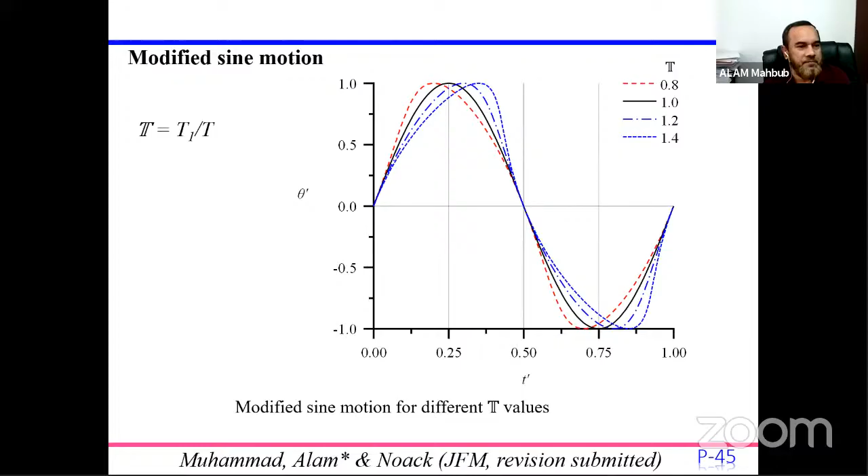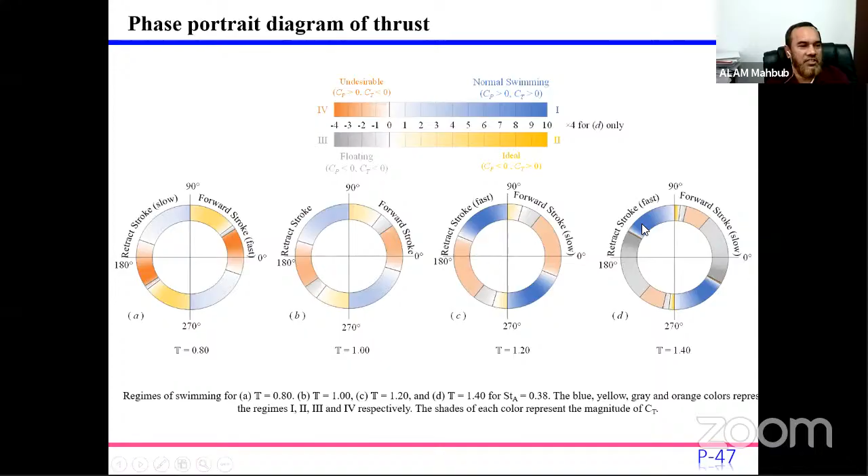This is the rose diagram for this condition, how it's changing, for tau equal 1, tau 0.8, and with increasing tau. What you see here, when the asymmetry is large, we have a very strong normal swimming condition. Both CT and CP lie in the return stroke, and that is the faster stroke. The opposite will happen at smaller tau.

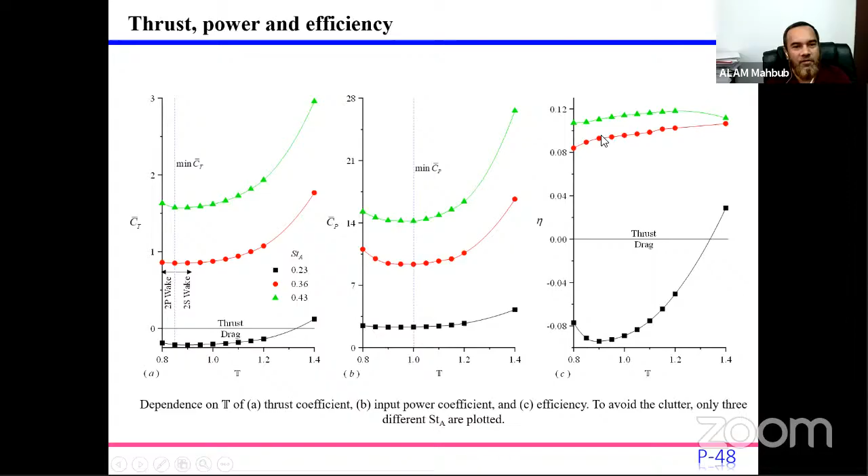Here you can see the quantitative magnitude of CT, CP, and efficiency with tau. Tau equal 1 means the symmetric oscillation. When the asymmetry is large, we have higher CT and also higher power. And you see the efficiency is definitely larger for all the asymmetric cases, particularly up to here.

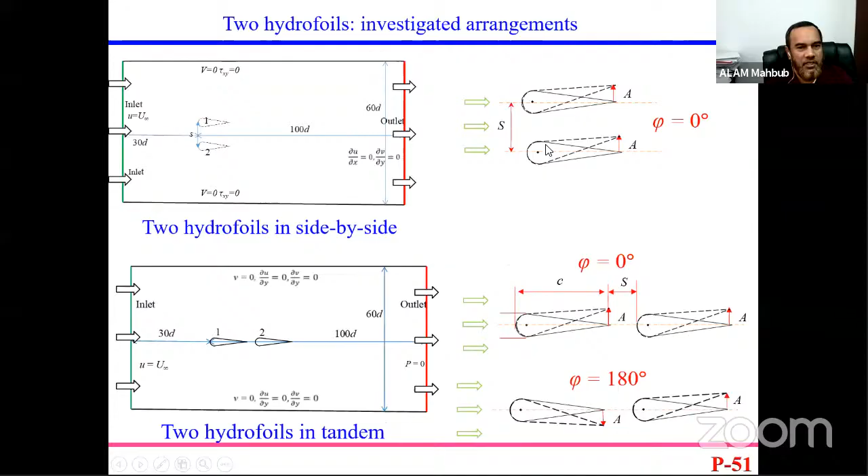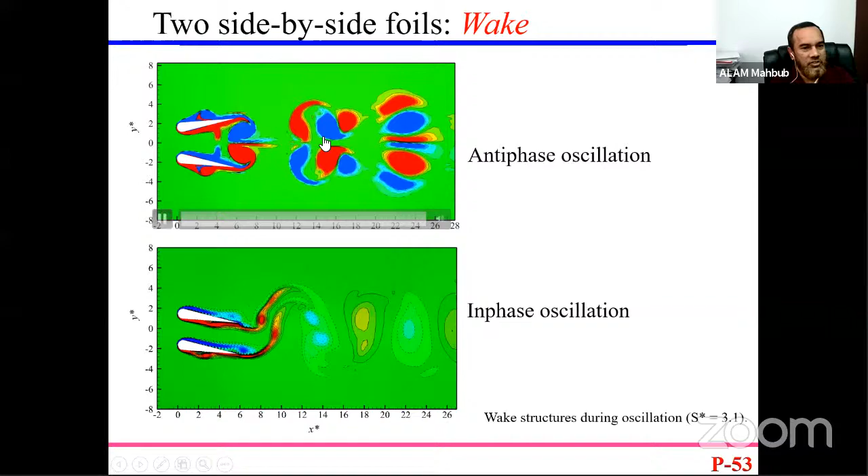Here is the wake structure for the two cases. This is the antiphase oscillation, in phase. From the wake structure, you can see we have a strong wake for the antiphase oscillation. Then this is the case for inline tandem foil.

Total means upstream and downstream foil combined, for both cases, total CP. Then we see the total power is higher for in-phase oscillation. Also CT is higher for the in-phase oscillation. But the efficiency is not the case, efficiency is the opposite.

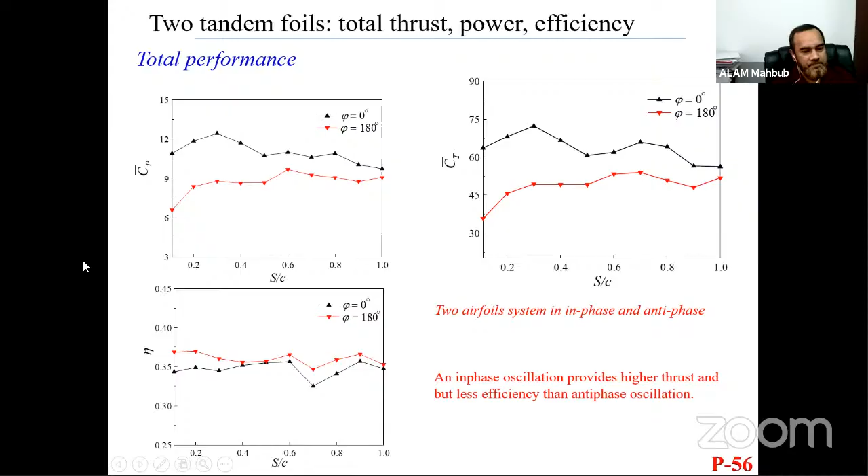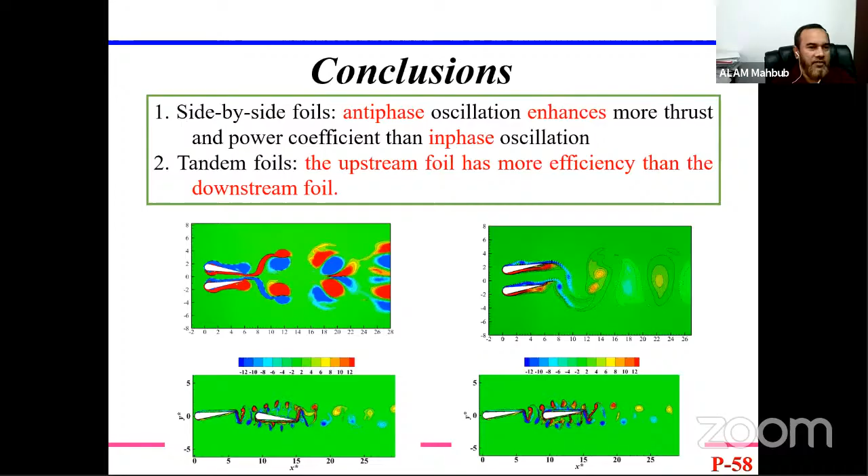For side-by-side foils, the antiphase oscillation gives more thrust and also more power coefficient. For tandem foils, the upstream foil has more efficiency than the downstream foil, and overall the in-phase gives more thrust. Thank you very much for your kind attention and patience.